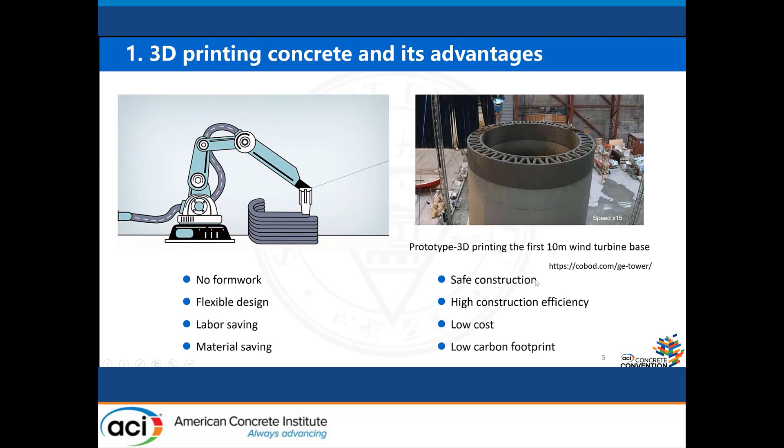We all know that for 3D printing concrete technology, there are many advantages compared with cast concrete. The typical one is there is no formwork needed. Using this technology, designers will be very flexible in their design. It's also labor saving, and there are many other advantages like safe construction, high construction efficiency, low cost, and low carbon footprint.

For 3D printing concrete technology, because of its special printing process, the requirement for material is quite different, especially for its fresh properties. For 3D printing, we need to first pump the material to the container, then extrude it through the nozzle. After extrusion, good buildability is needed. So for mix design of 3DPC, the first thing is to design good printability in fresh concrete. This is a very basic requirement.

But because of this special technology, there is a limitation on material use, especially the lack of coarse aggregate. Currently printed concrete projects mainly use mortar, but not concrete with coarse aggregate.

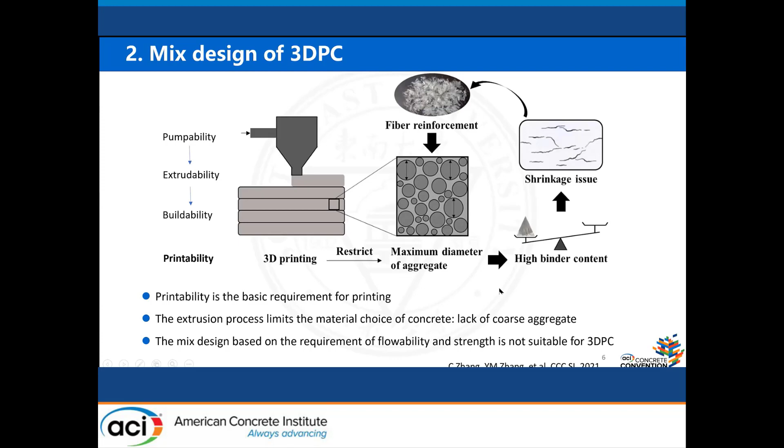We have done some research in my group about the mix design for this special technology. So far we find from many literatures that in fact there is no established design method — many researches are based on experience, using trial and error tests in the lab. But this is not good for developing this technology.

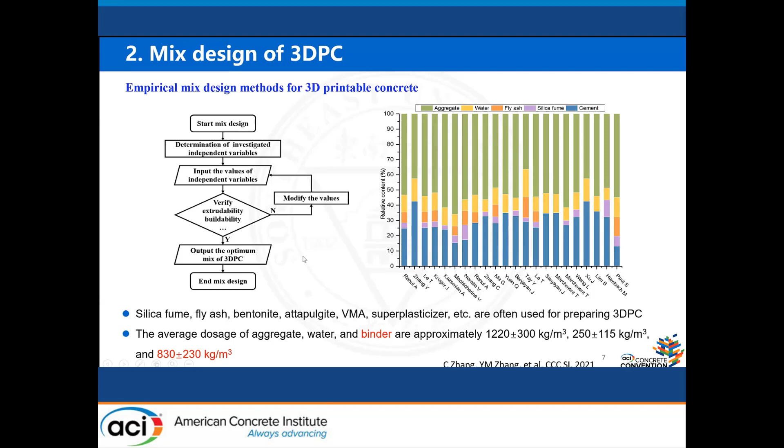Here are some statistics about the current research on 3DPC. Researchers use different materials like silica fume, fly ash, bentonite, and other materials to adjust the printing property of 3DPC. But to better promote the technology, we need other models — especially some theoretical models would be better for us to use this technology.

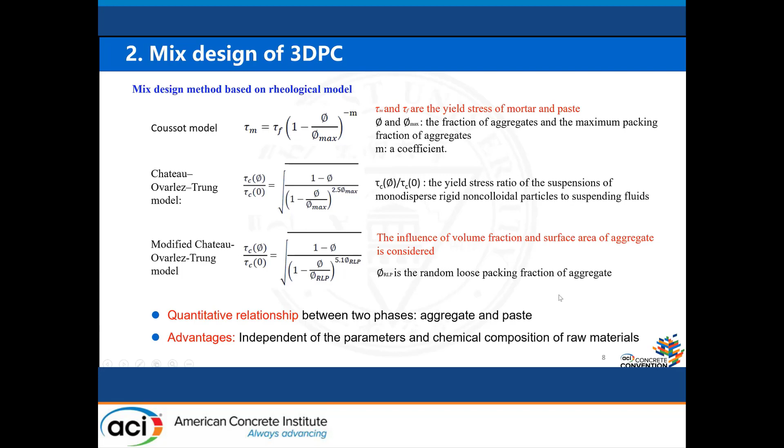In my group, we tried to use excess paste theory to do the mix design, because for 3D printing concrete, the paste thickness around the packing aggregate is a key parameter for designing the concrete. It determines the flowability and the extrudability of the concrete.

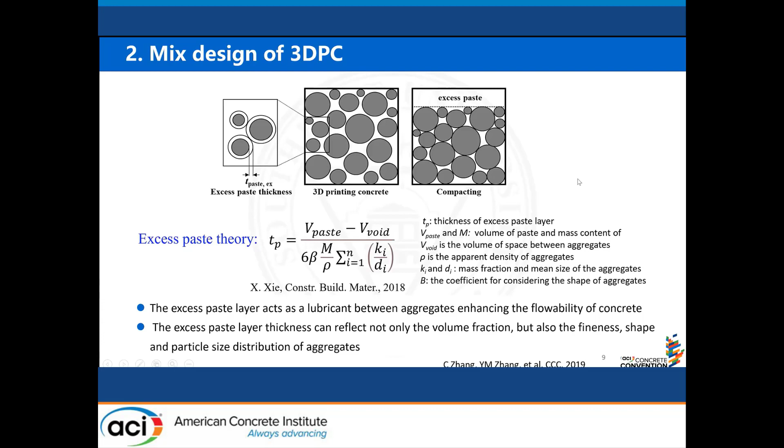Excess paste theory, or excess paste layer thickness, is a very important parameter that can reflect not only the volume fraction, but also fineness, shape, and particle size distribution of aggregates. So we have used this method to design 3D printable concrete.

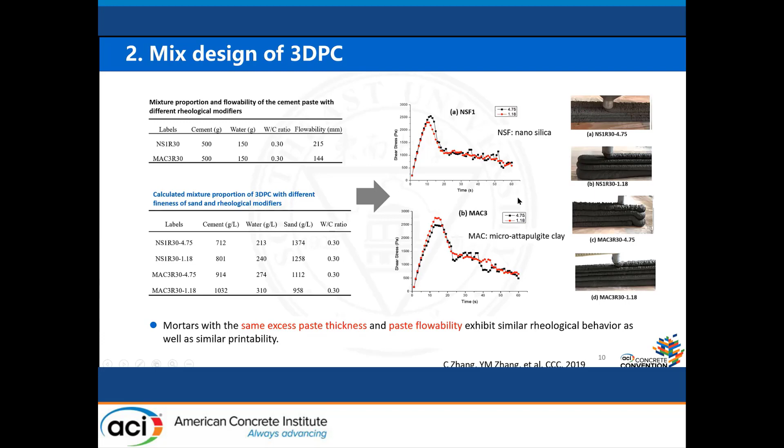We use different mixtures, different materials to prepare the concrete. But if we can design the excess paste thickness and know the paste flowability, you can see the designed properties of printed mortar or concrete have very similar printability, and of course also very similar rheological property.

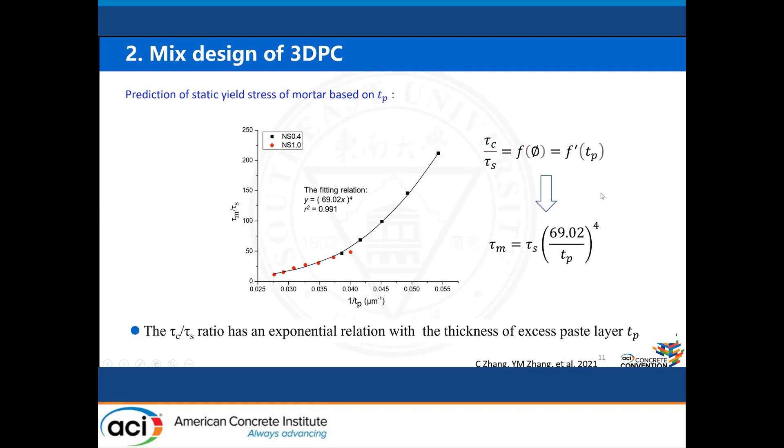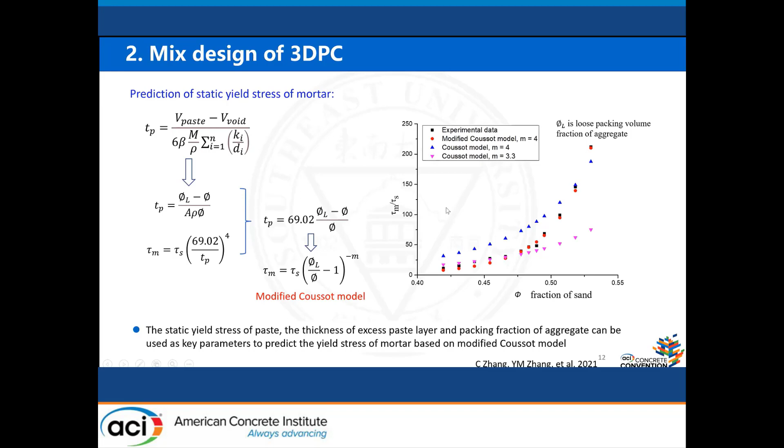We also developed a modified Coussot model to better predict the yield stress of mortar, because only when the yield stress of mortar lies within a certain range can this concrete be printed.

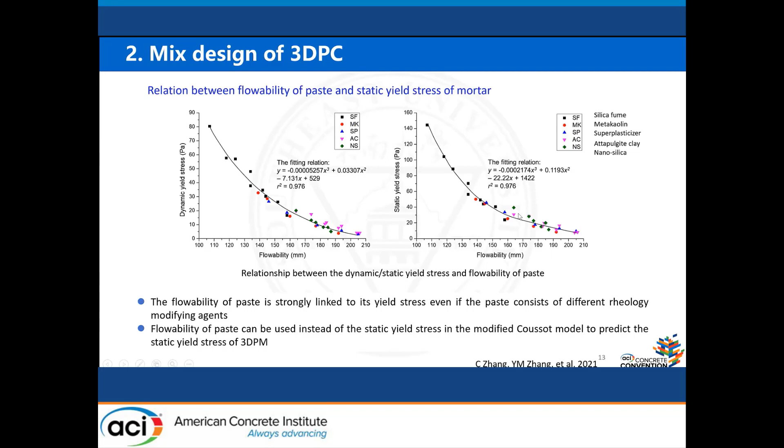But in some labs, they do not have a rheometer to test the rheological properties. So we try to find the relationship between the yield stress of the material and the flowability. It's very easy to test the flowability of fresh concrete, so we also find a good relationship. This makes it very easy for us to design 3D printable concrete.

Next I would like to introduce 3D printable concrete with coarse aggregate, from some published papers and also from our experience. Here are some elements exposed in the air for 1 or 2 years, and we can find some cracks. So cracking is an issue now because we mainly use mortar, so it's quite necessary to print concrete with coarse aggregate.

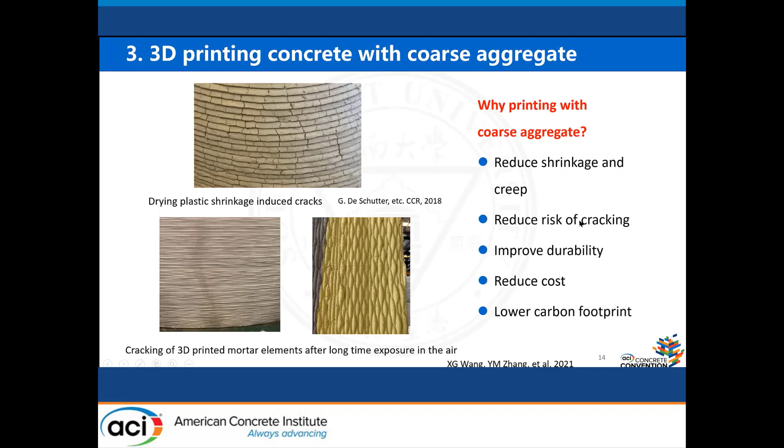The reason is very simple, so I will go directly to our research. In our lab, we have printed concrete with coarse aggregate. The maximum diameter of coarse aggregate is still not too large, about 5 to 10 millimeters. This is the printing in our lab.

You can see from this picture that there is no visible interlayer interface or defects between the layers. That means the printing of this concrete is successful.

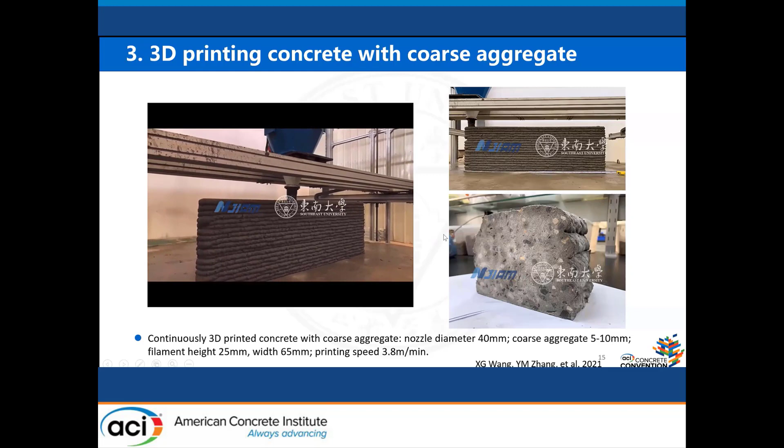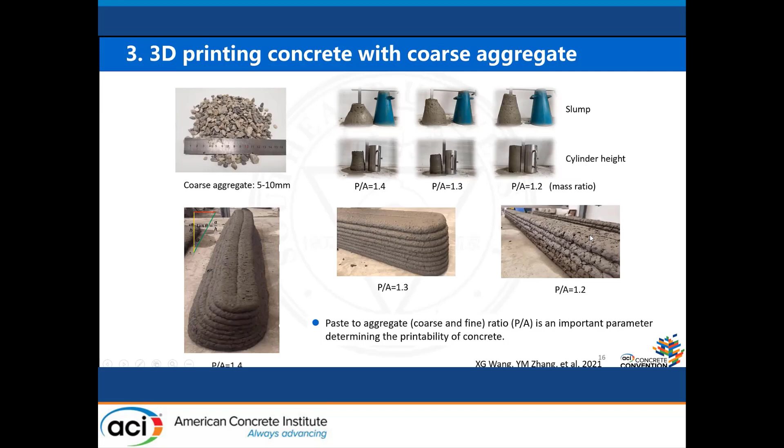For concrete with coarse aggregate, the paste-to-aggregate ratio is a very key issue that determines the printability and the stability of the printed filaments. For example, on the left side, when the paste-to-aggregate ratio is too high, it's not stable, it's not what we want. But when the ratio is right, we get a very satisfactory 3D printed concrete.

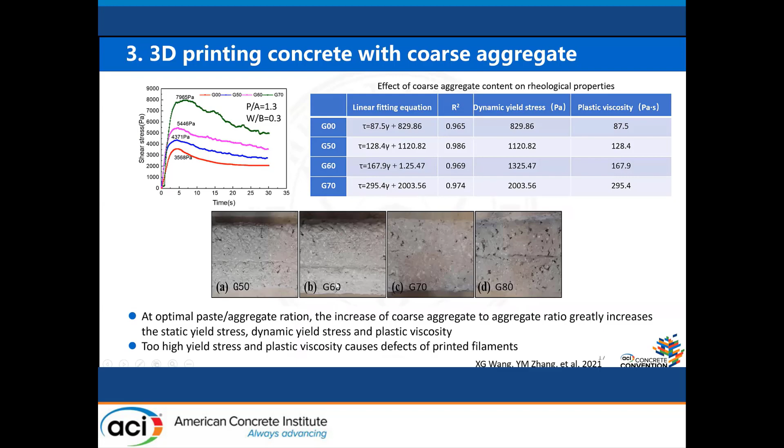We also investigated the ratio of coarse aggregate to the total aggregate. We found that when the coarse aggregate content is too high, we can find defects - this is not so satisfactory. But at the proper coarse aggregate volume, we can get a very good surface of the 3D printed concrete.

Here are some mechanical properties of 3D printed concrete with coarse aggregate compared with cast concrete. From published papers, some research showed that the strength of 3D printed concrete with coarse aggregate is normally smaller than cast concrete, but in our investigation we found higher mechanical properties of 3D printed concrete when we use coarse aggregate.

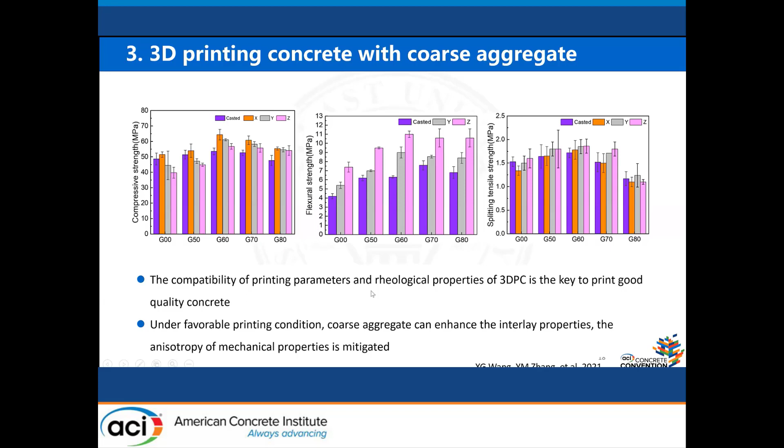It is because of the compatibility of printing parameters and the rheological properties. Also, for 3D printed concrete, there is no protection from formwork after casting, so that means the environment will greatly affect the properties of concrete.

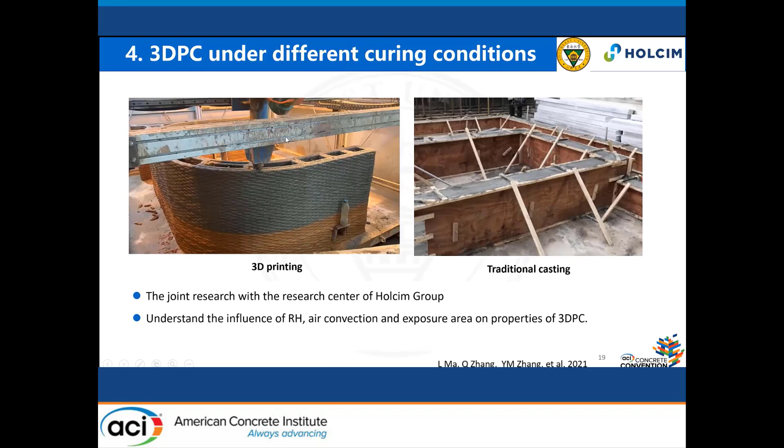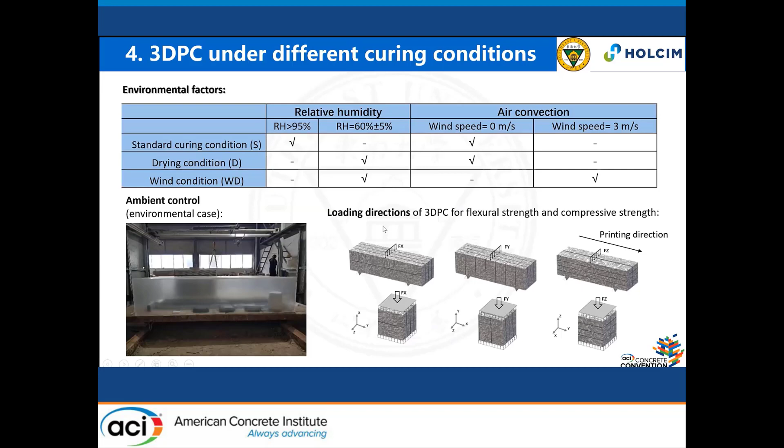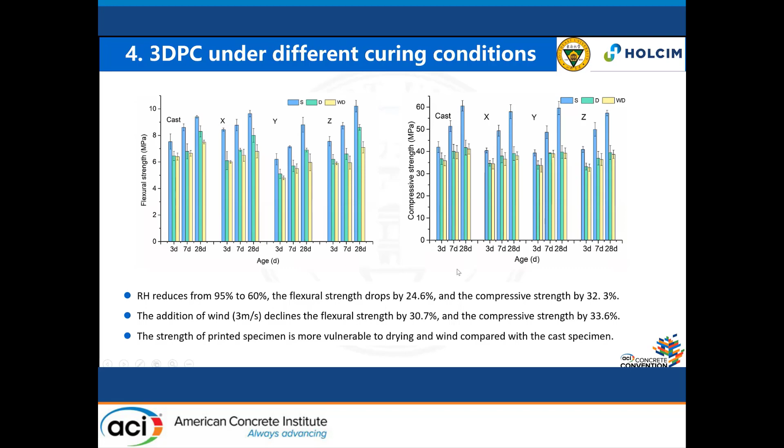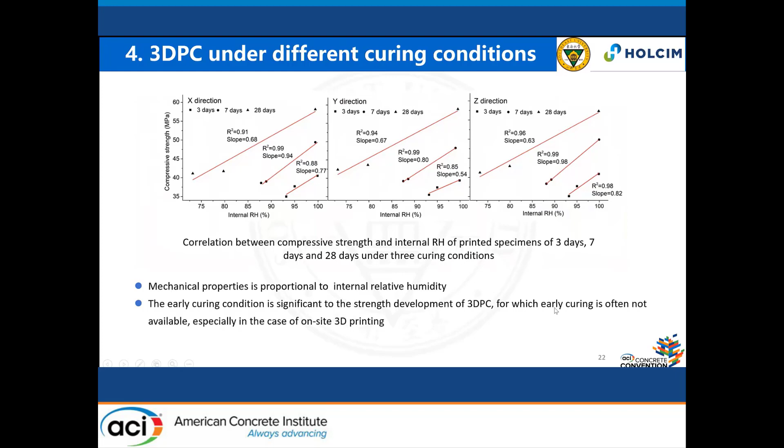We found the relationship between the mechanical properties and the internal relative humidity. The result is that early curing condition is quite significant to the strength development of 3D printing concrete, for which early curing is often not available for on-site 3D printing.

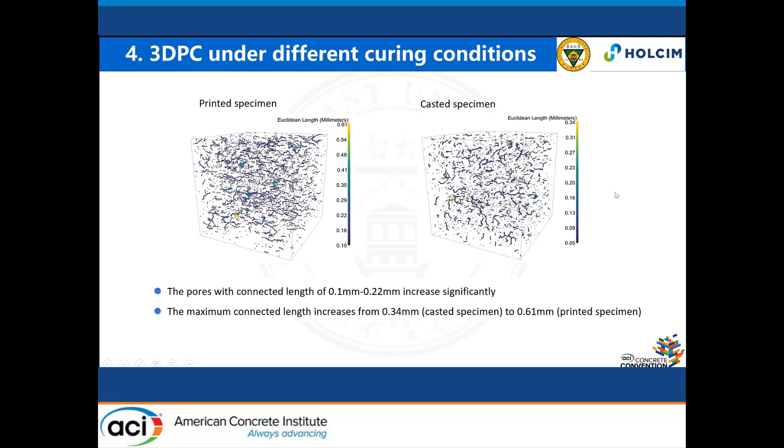The reason for this is for 3D printed concrete, we got more connected pores that in fact affect the mechanical properties. So now let's move on to the application of this technology.

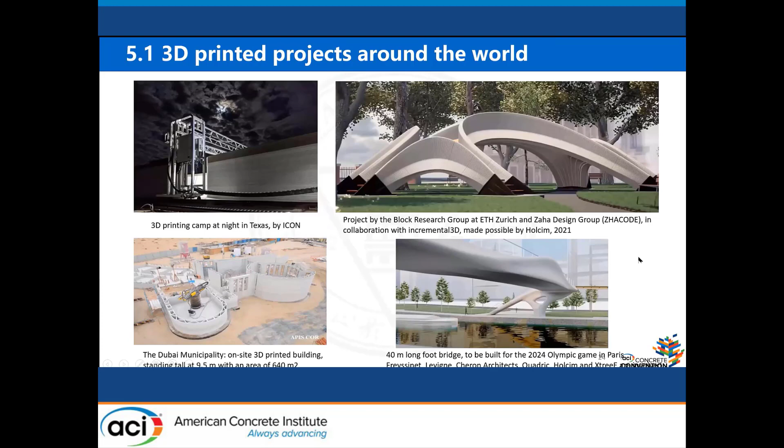So far there are many applications for 3D printing concrete. I will not go into details about these projects, but there are now different application methods: on-site 3D printing or fabrication of 3D printed elements in the factory. The difference between these two technologies is that for on-site 3D printing, the printing process is influenced by wind, temperature, and humidity, so on-site curing is an issue. But for the fabrication technology, printing quality can be guaranteed in the factory.

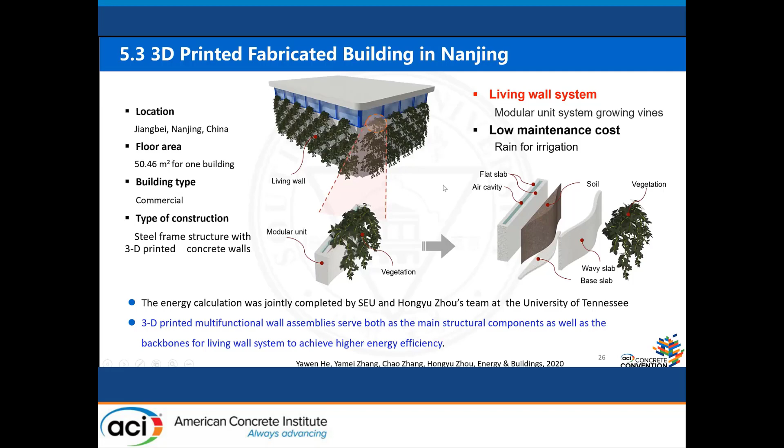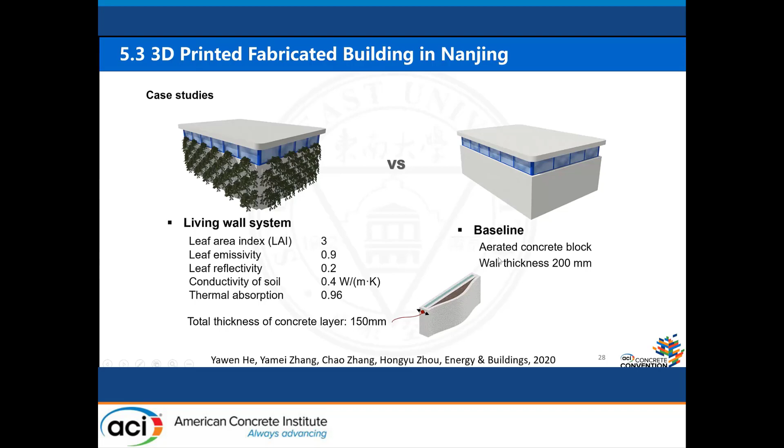I just want to show you a typical application of the 3D printed fabricated building in Nanjing. This is the calculation of heat transfer, joint work between my group and Hongyu Zhou's team at the University of Tennessee. The wall is 3D printed and fabricated on site. We consider the heat transfer between indoor and outdoor, and compare the heat transfer between two typical buildings: this 3D printed wall system, and a conventional autoclaved aerated concrete block wall system for comparison.

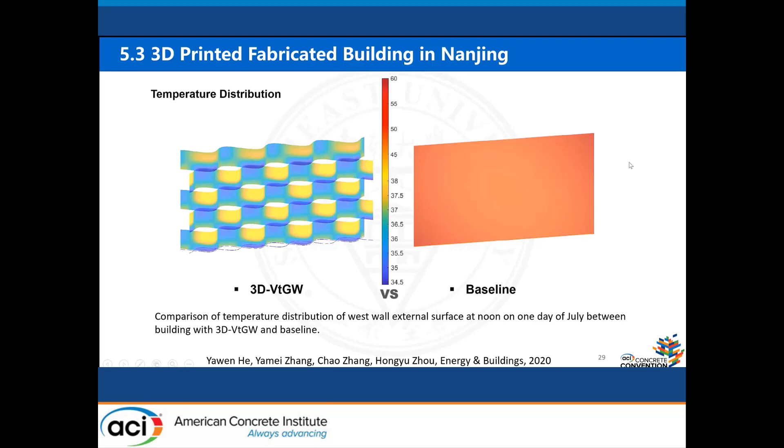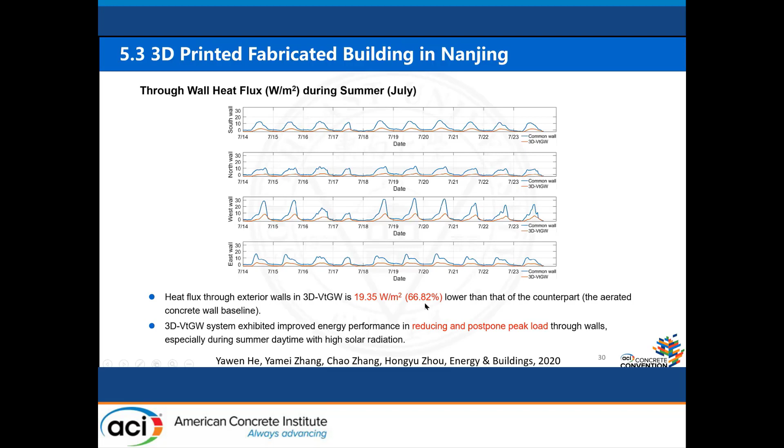We compared the temperature outside on the surface of the west wall. In summer, you can see the temperature on the surface is much lower than the traditional one. This is the wall heat flux of the building. We can see that the heat flux of this 3D printed wall system is about nearly 70% lower than that of the counterpart.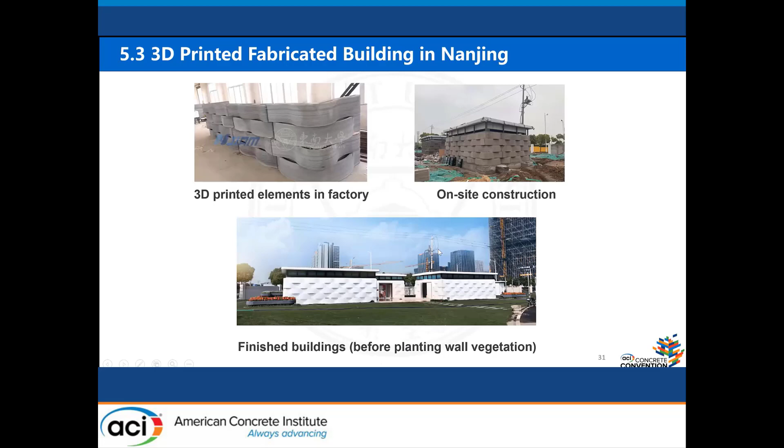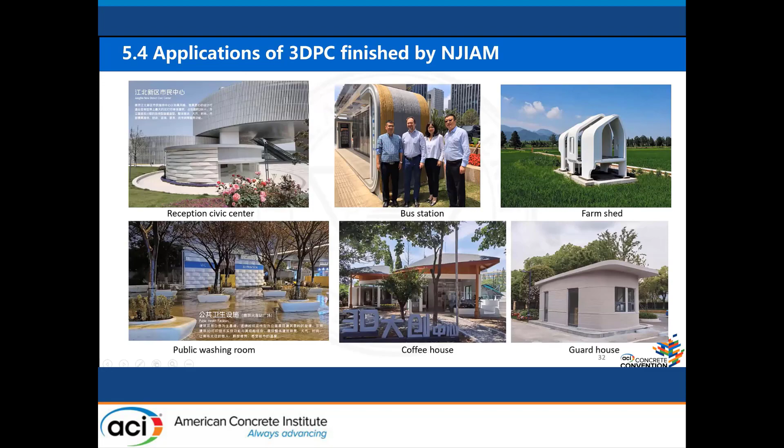We also have some other applications of 3D printed technologies, meaning fabricating on-site using 3D printed elements made in the factory. Here are some typical pictures of projects we have finished, and some other uses of this technology.

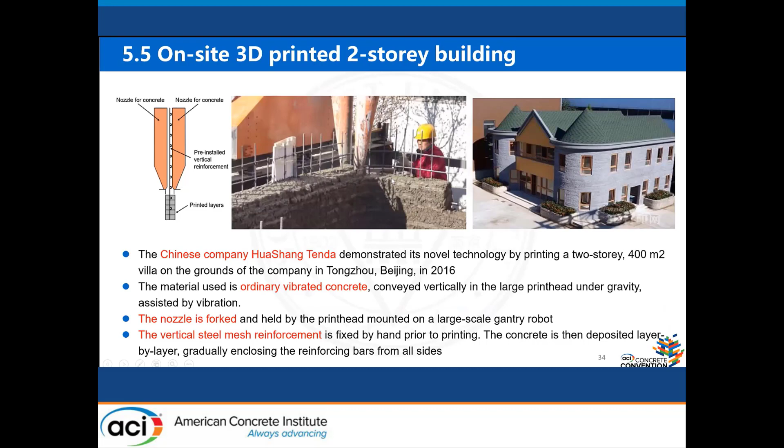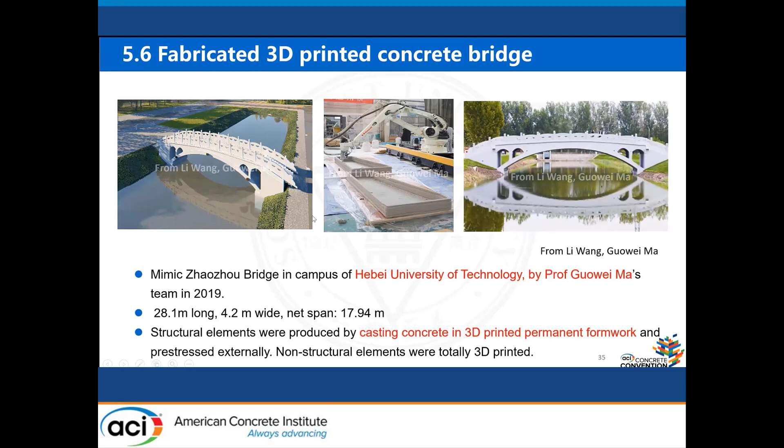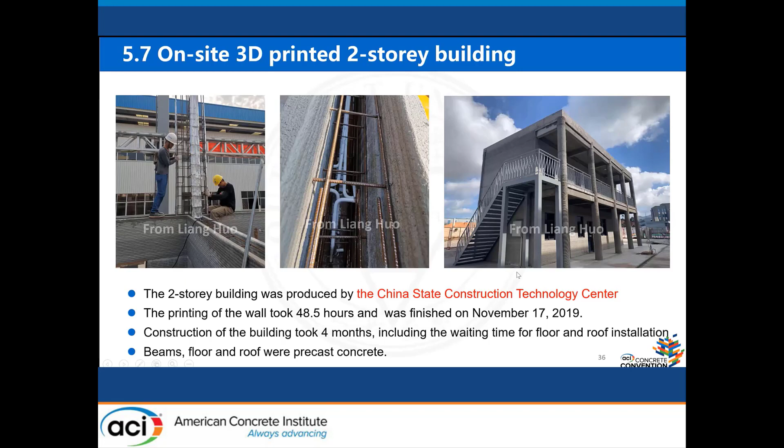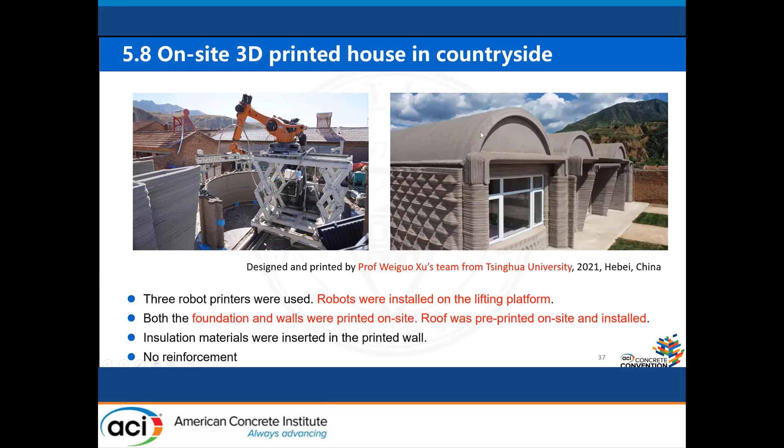This is a very recent work from Professor Weiguo Xu's team from Tsinghua University in China. They used three robot printers to print, installed on a lifting platform. For this building, there's no steel reinforcement at all. The roof is also printed, but it's installed after printing.

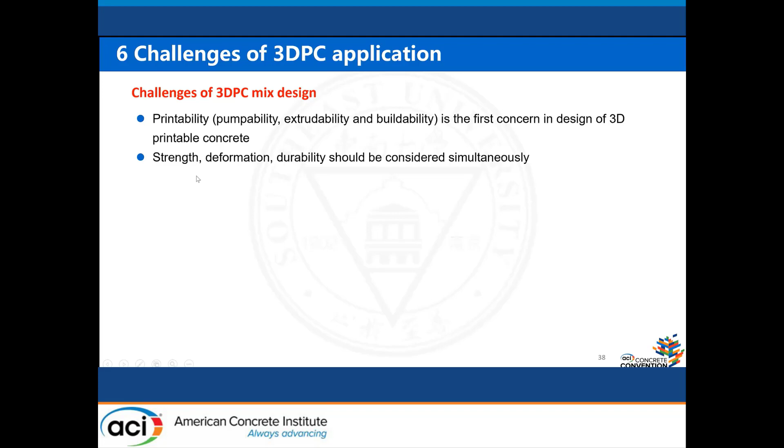Finally, I want to talk about the challenges of this technology. The first challenge is 3D printed concrete mix design, because current mix designs of conventional concrete are not suitable for 3D printed concrete. Printability is the first concern in the design of 3D printable concrete, and in the meantime we also need to consider strength, deformation, and durability when we design the concrete.

Another challenge is about 3D printing with coarse aggregate. We first need to develop printing systems because the system for printing coarse concrete may be a little different from printing mortar, and also need suitable printing technology. We also need favorable surface treatment of the printed concrete with coarse aggregate.

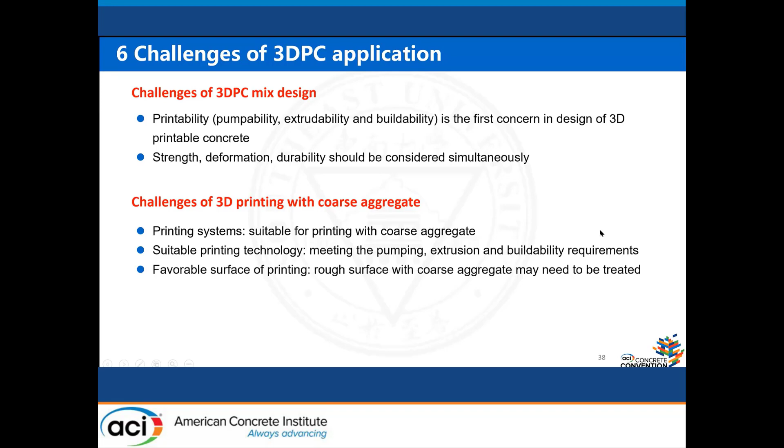Another issue is the reinforcing of 3D printed concrete. There are already some technologies, but so far these reinforcing technologies are not very satisfactory because the reinforcement can interfere with the progress of 3D printing. Maybe we need to develop new structures that are independent of traditional reinforcement, and also develop new reinforcement approaches that can coordinate 3D printing of concrete and the layout of reinforcement to reach high efficiency of this technology.

One important issue is the standards needed for this technology, because when we want to push the application, standards are always needed. We need to develop testing methods, design codes, and quality acceptance for 3D printed concrete elements and structures. So I think this is all I want to share with you. Thank you for your attention.